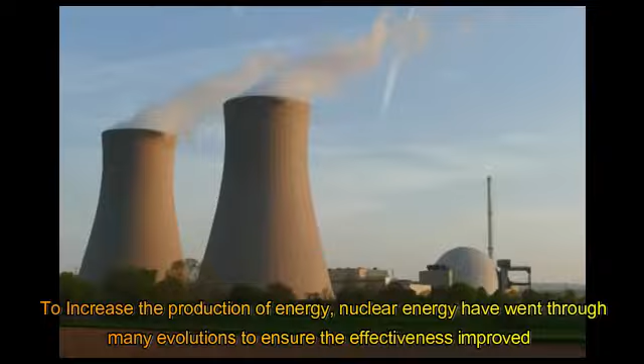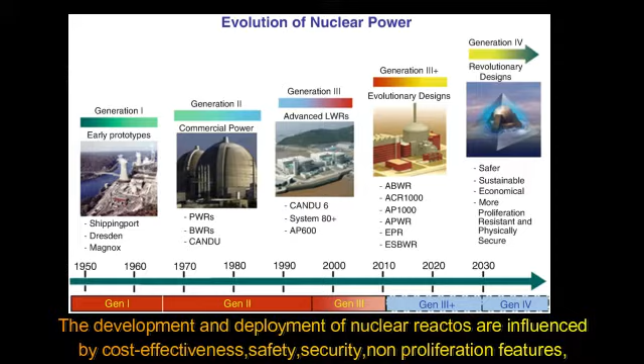Nuclear reactor. Over the years, energy consumption grew substantially to fulfill demands of citizens. To increase the production of energy, nuclear energy has gone through many evolutions to ensure the effectiveness improved from one generation to another. The development and deployment of nuclear reactors are influenced by cost-effectiveness, safety, security, non-proliferation features, grid appropriateness, commercialization roadmap including constructability and licensability, and management of the fuel cycle.

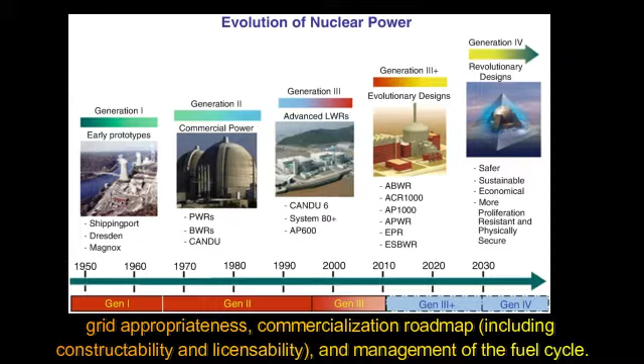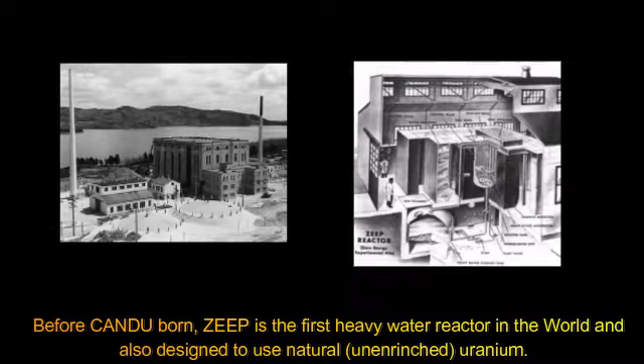But now let's explore what is a pressurized heavy water reactor, PHWR, which is in the evolution of generation 2 and 3, also known as the Canada Deuterium Uranium Reactor, CANDU. Before CANDU was born, ZEEP was the first heavy water reactor in the world and was also designed to use natural, unenriched uranium. In the following years, researchers designed many experiments until 1960, when the 20 MWe CANDU's first prototype was successfully produced. Now in 2020, several countries already have the enhanced CANDU reactor: India, Pakistan, Argentina, South Korea, Romania and China. Let's take a look at the components of CANDU.

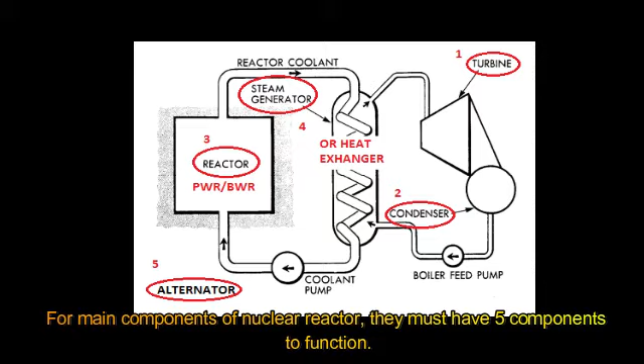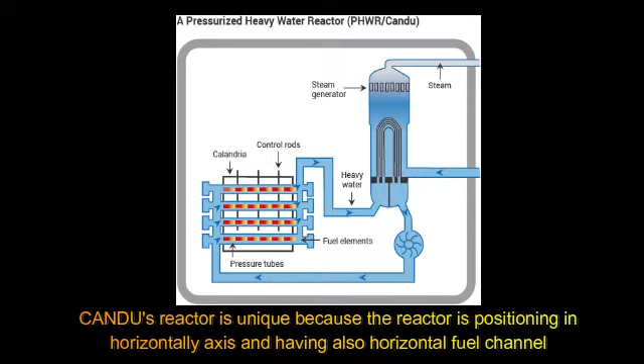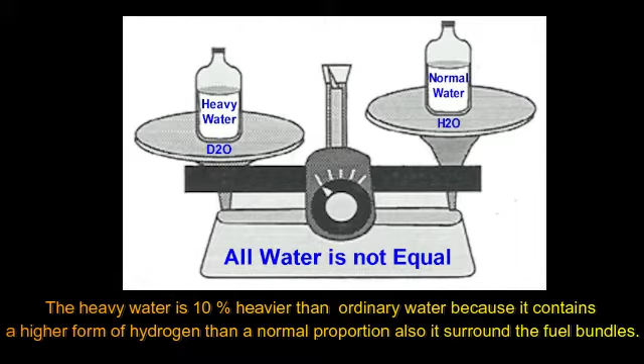For main components of a nuclear reactor, they must have 5 components to function. CANDU's reactor is unique because the reactor is positioned on a horizontal axis and also has horizontal fuel channels. How does it work? The CANDU operates much like a PWR, but instead of using conventional light water as moderator and coolant, it uses heavy water, known as deuterium oxide. The heavy water is 10% heavier than ordinary water because it contains a heavier form of hydrogen than normal proportion, and it surrounds the fuel bundles.

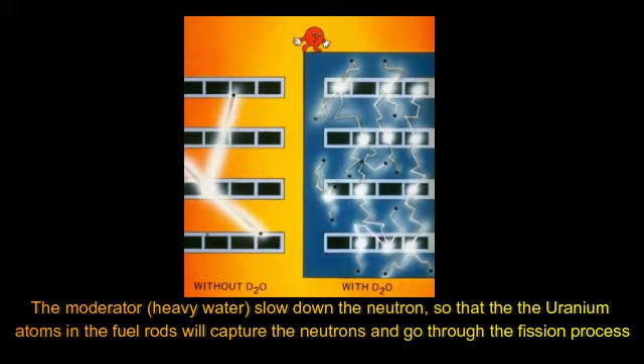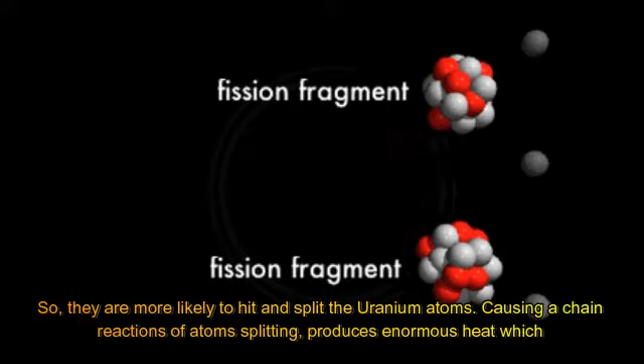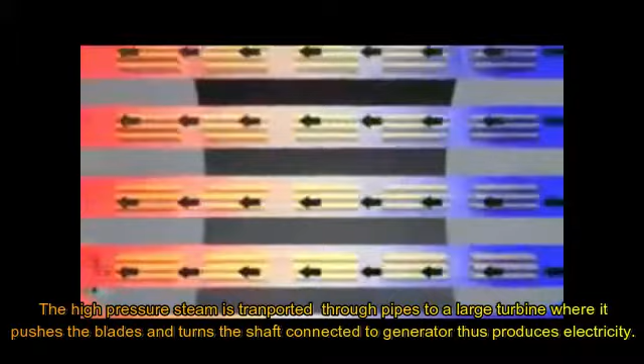The moderator, heavy water, slows down the neutrons so that the uranium atoms in the fuel rods will capture the neutrons and go through the fission process. So they are more likely to hit and split the uranium atoms, causing a chain reaction of atom splitting, which produces enormous heat that superheats the water surrounding the core. The superheated water is pumped in a closed system to the steam generator, where it boils ordinary water into high-pressure steam. The high-pressure steam is transported through pipes to a large turbine, where it pushes the blades and turns the shaft connected to the generator, thus producing electricity.

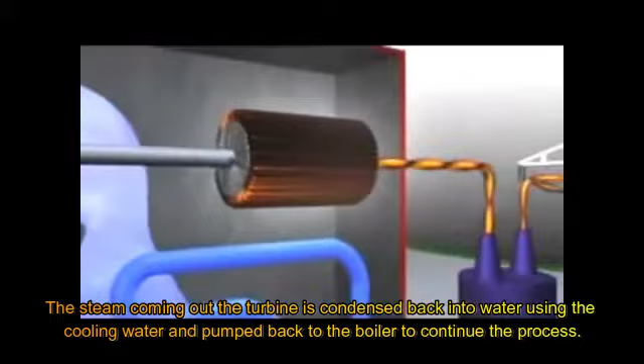The steam coming out of the turbine is condensed back into water using the cooling water and pumped back to the boiler to continue the process. The advantages of using CANDU as a reactor: first is low fueling cost, since the CANDU reactor only uses natural uranium as fuel. Second is on-power fueling, which allows nuclear fuel to be removed or added during operation without having to shut down, giving a capacity factor that increases the time a power plant is active, and constant neutron dynamic parameters. And the last one is automatic plant operation, which gives the operator freedom to think about inspection and maintenance most of the time. Common questions about the CANDU reactor.

Why do we need to use heavy water rather than ordinary water? It is the best moderator to slow down a speedy neutron, better than ordinary water. How long is the lifespan of the fuel bundle? The typical lifespan of a fuel bundle in the reactor is 1 to 2 years. How much energy does CANDU generate? From here, it's shown the best generating power is CANDU 9, whose net electrical output is 1031 megawatts.

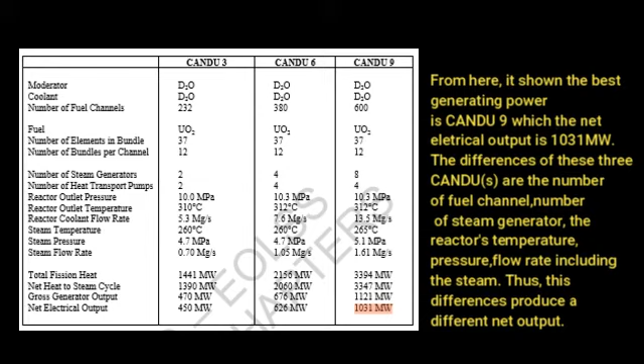The differences of these 3 CANDUs are the number of fuel channels, number of steam generators, the reactor's temperature, pressure, and flow rate, including the steam. Thus, these differences produce a different net output. What are the differences in moderator, coolant and fuel between the CANDU reactor and other nuclear reactors? The CANDU reactor is also included in the thermal reactor group, but it has a different type of fuel, coolant and moderator.